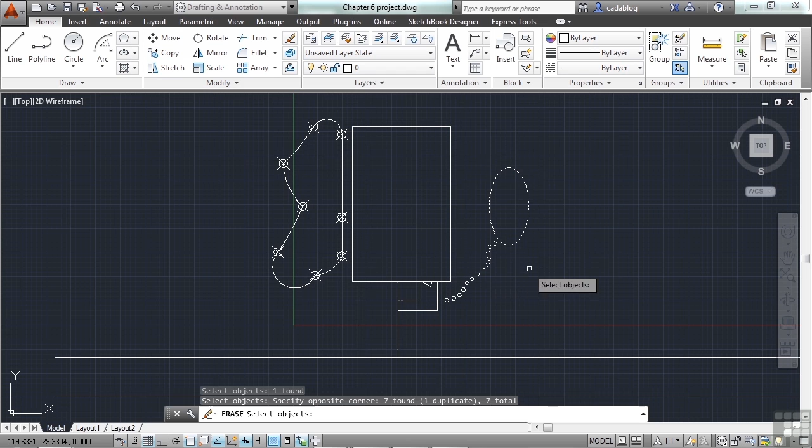So to do this, we use the Erase command. You can find it in the ribbon right here in the Modify panel. In this chapter, we're going to spend a lot of time in the Modify panel. Click the Erase button, then select an object or objects that you want erased. Press Enter, and they go away.

You can start the command first, or make your selections first and then start the Erase command, and then they go away. You can type in the word erase, or just the letter E, press Enter, pick your objects, press Enter again, and they go away. If you select your objects first, then start the Erase command, you're done—you're not in the command anymore.

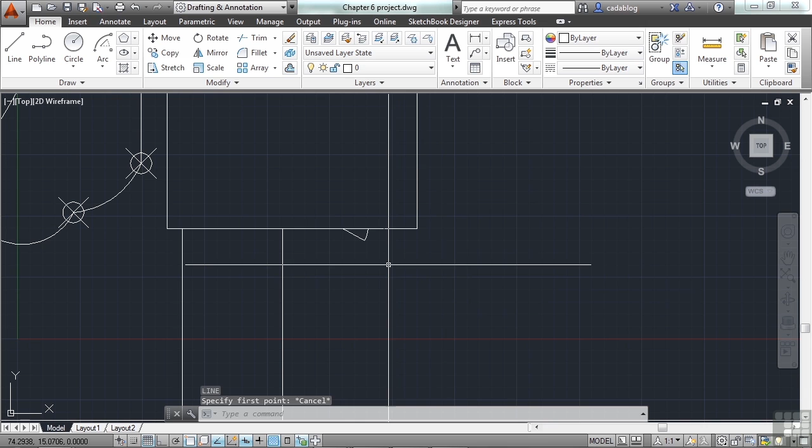I can start my line command and draw something. Now you can also select objects and then hit the Delete key. Either of these methods, the Erase command or the Delete key, they work the same way. They do the same exact thing.

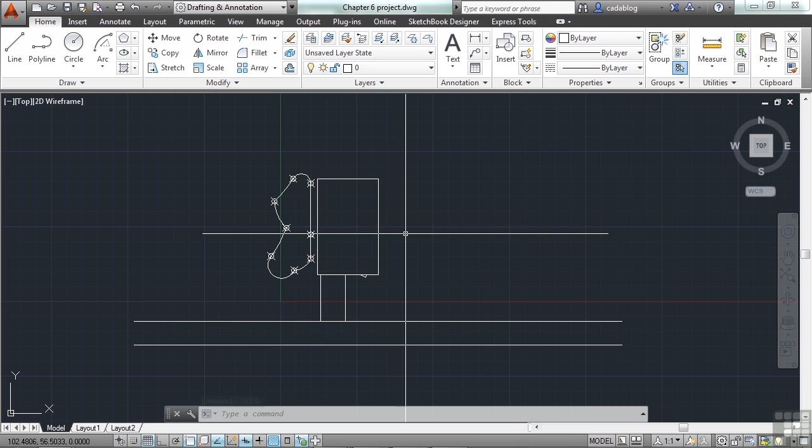Now, what if you accidentally erased something? There's the Oops command. You can type that in, press Enter, and that will bring back the last things you erased or deleted. That's nice. You might ask, well, why can't I just use the Undo command? Well, you can—you can go back, find all the things you erased, and undo it.

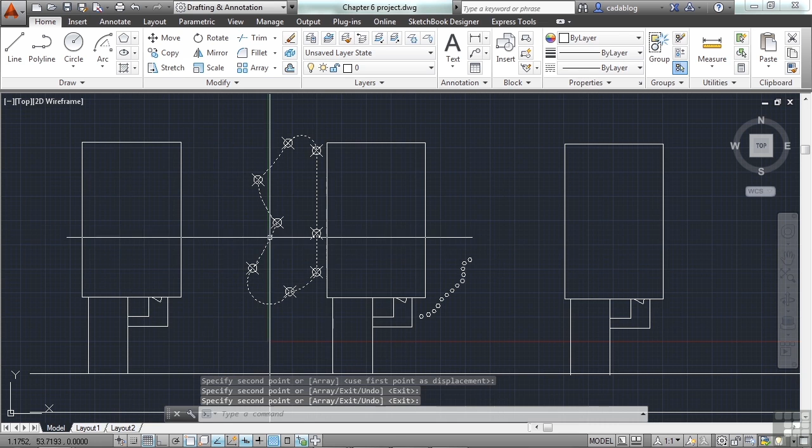But let's say I accidentally delete or erase my pool, and then I do a whole bunch of work, like recreating another building right next to this, and then one over here, etc. Well, I don't want to undo all of my work—I just want to get my pool back. So if I undo everything, this is all going to be gone. I don't want to do that.

I can just type in oops, and it brings it back for me, and I didn't lose any work. Just a minor inconvenience. So that's great.

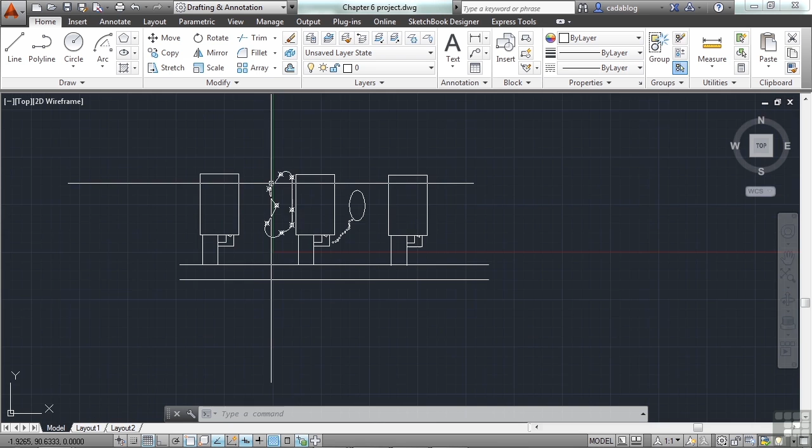Now sometimes, when you erase your objects or do other work, you're zooming in and out and things get messed up on the screen. Your drawing's not really affected, but something's just kind of screwy with your computer. Sometimes, for example, a circle or an arc will get segmented, meaning it won't be a round, smooth curve—it'll be a series of jagged lines. That happens. Or when I zoom into these points, they're too big.

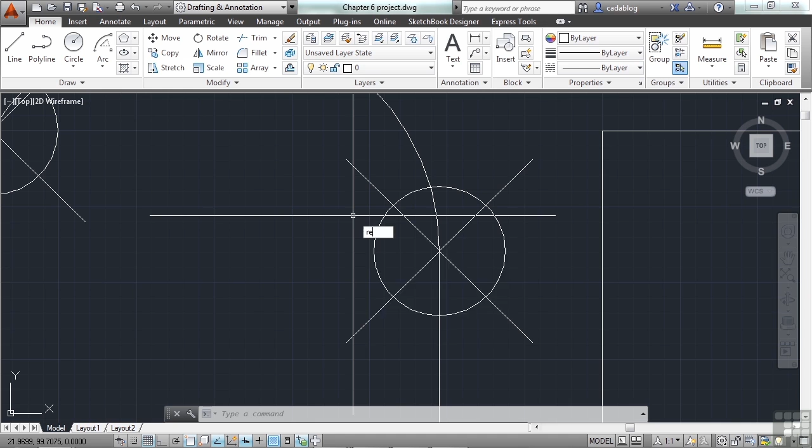Things like that. Or sometimes when you delete an object, there'll be a screen remnant, meaning your video card just didn't completely render your screen properly. That happens. When it does, just type in REA for Regen All. That will clean it up.

We've seen that before when we've zoomed out and started panning and just can't pan anymore. Type in REA for Regen All, and it will fix that. It will also re-render your points so that they'll be in the proper size, assuming you've set them up to be a size relative to your screen.

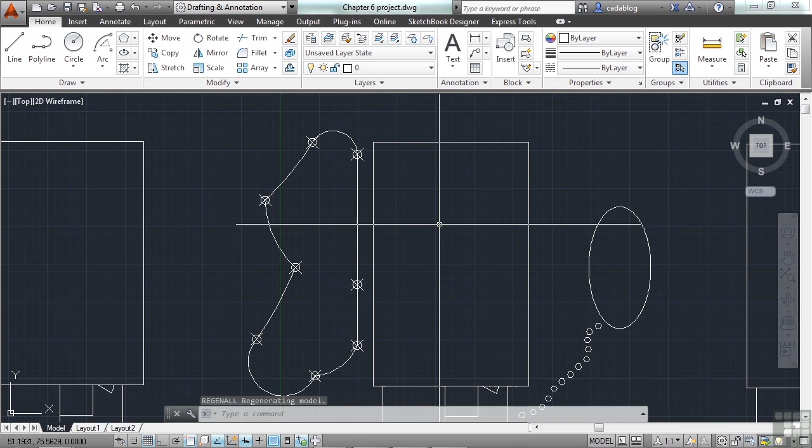So that's the Erase command. You can select your objects first or after you start the command. You can use the Erase command itself, or you can use the Delete key on your keyboard, whichever way works best for you.